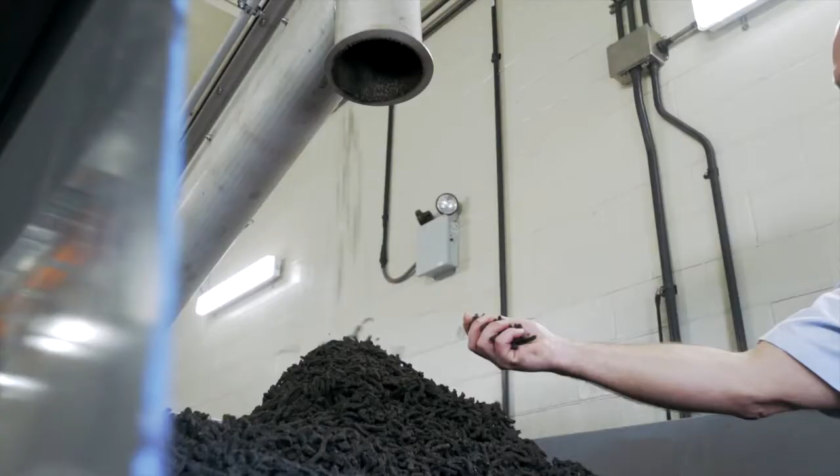As many of you may know, RMI has been a leader in residuals recycling for the past 25 years. We help municipal and industrial wastewater treatment plants recycle residuals such as short paper fiber, hydrosolids, and biosolids. RMI has handled dried Class A in the past and has become very familiar with the benefits of having a dried product. So RMI had a few strategic partnerships in mind.

We partnered with Brattleboro, Vermont, who was our first pilot installation, and our next was Hooksett, New Hampshire, both of which were very successful. Brattleboro has since wrapped up their pilot study, and Hooksett is about 6 months in. We will talk a little bit about both installations and what we're doing now, our next steps, in this upcoming presentation. Joining me will be Charlie Hansen, our senior project manager, and Steve Nurmi, our sales manager. We'll kick the presentation off with a little video about our Hooksett installation.

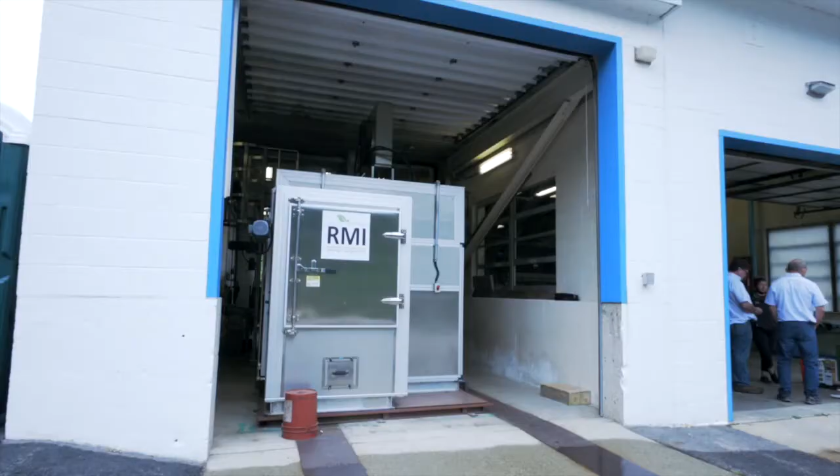The top 3 reasons somebody should go with the Shincci technology: one would be cost savings, the footprint is the smallest on the market, and the third being, it's simple. It produces an on-site Class A product that's ready to ship directly to farm. Competitive products are hundreds of RPMs, hundreds of degrees. We're 5 RPMs and 170 degrees, much more of a dehumidification than a drying.

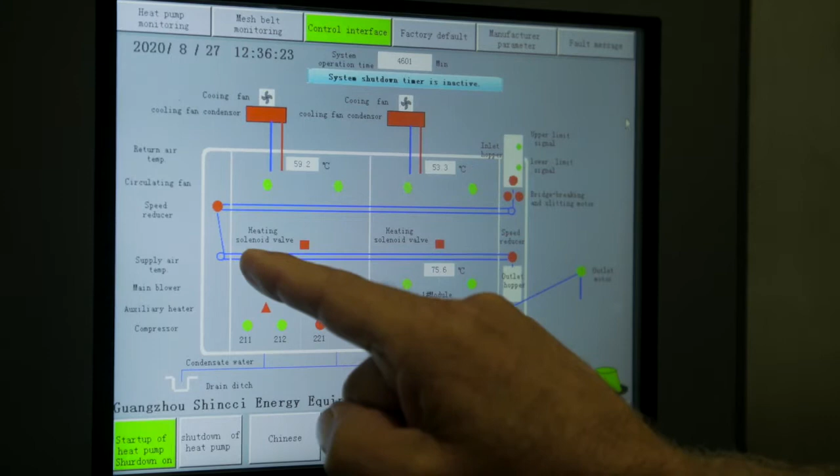The Shincci 4800 evaporates 4,800 kilograms of water in a 24-hour period. This facility is taking in 16.5% solids and discharging 93% solids.

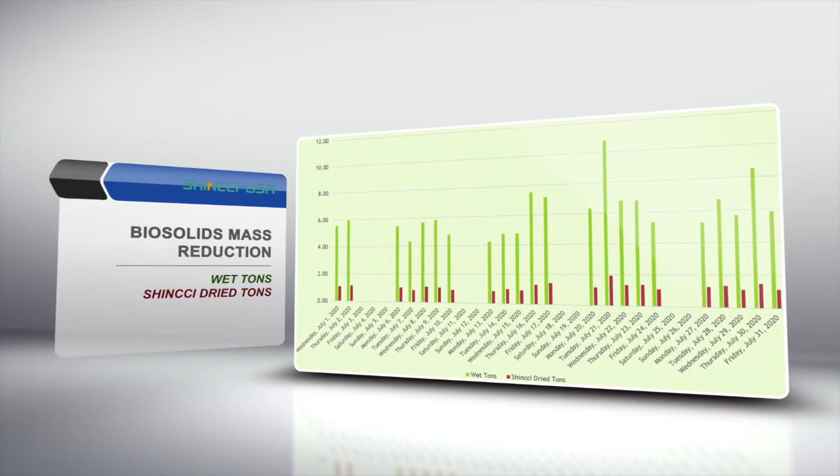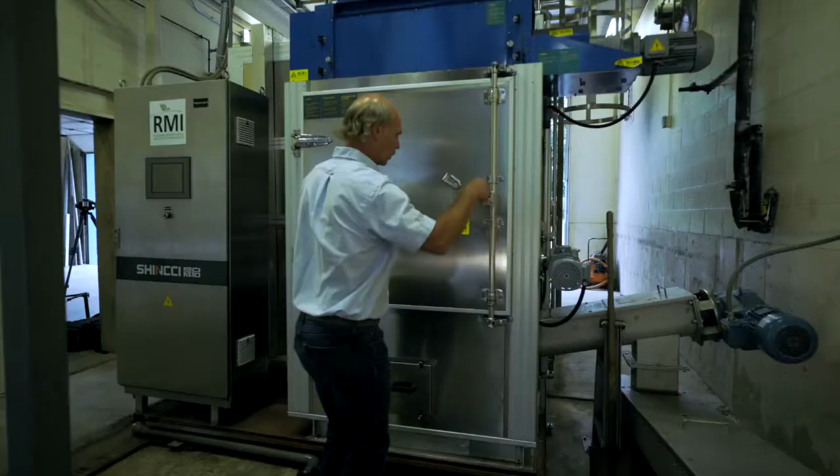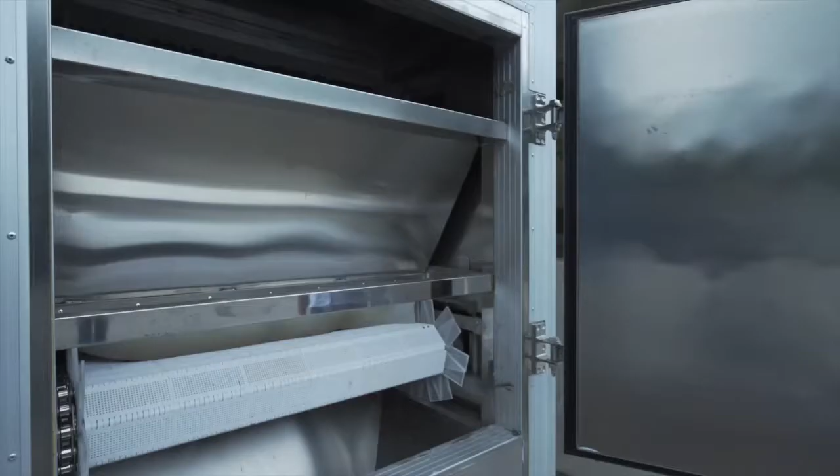Two proprietary things with Shincci are the slitter and the heat pumps. The heat pump is extremely efficient. The slitter is rollers, kind of like a pasta machine, versus an extrusion, which can clog up with the fiber. So we're going to take you right through the slitter, where we increase the surface area by making noodles. Those noodles will be laid down on a belt. It's a perforated belt that allows dry, hot air to come up through the bottom, as well as convection on the top. It travels down a top belt, turns once, comes back on the bottom belt, and is discharged at 90% solids.

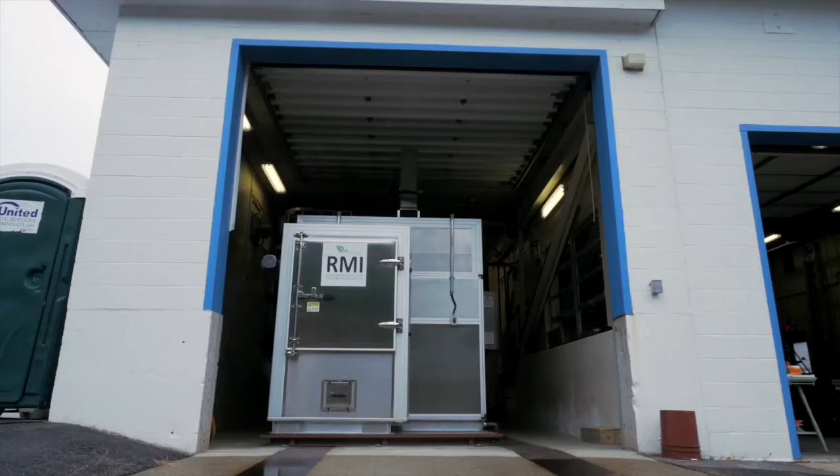The footprint is the smallest on the market. There are really only 2 sizes - you've got a small unit and a large unit. So it's not like we have models for all these applications, it's modular. One is 7.5 feet wide, the smaller unit, and 10 feet 2 inches is the larger unit.

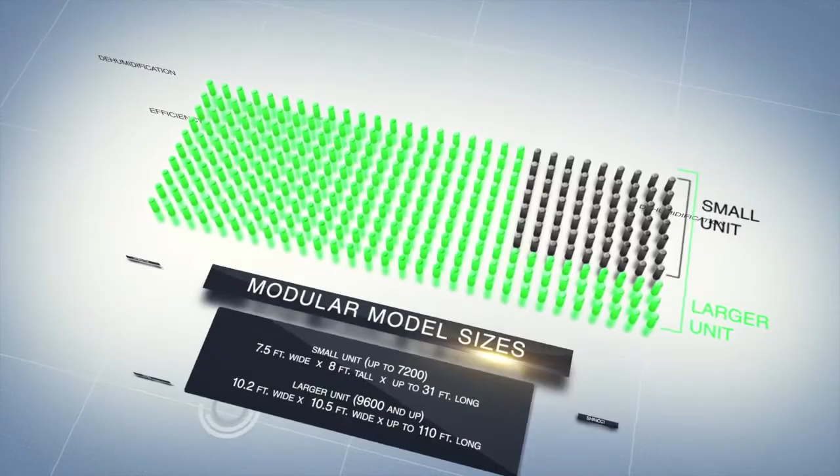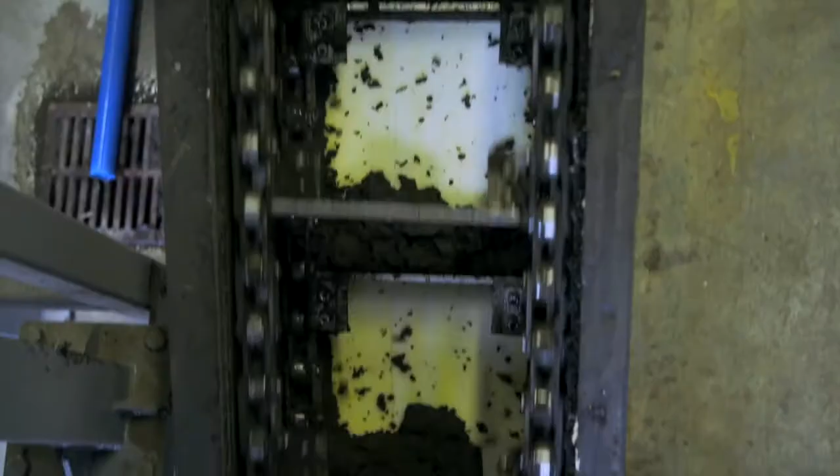Here at Hooksett, it's a very challenging type of wastewater solids to get the water out of. This is just what they call a secondary plant - there's no primary sludge being wasted off the process. After some initial challenges here, we're consistently getting about 17%, and the dryer is handling it great. We're easily able to keep up with the solids production coming off the process. So in this case, at this Hooksett installation, it takes about a little over 3 hours to get all the way through those belts, and at the end you get out a 90+% dried product.

We got into this because we were interested in making a great dried product and reducing the impact from having to transport all this material. When something's wet, you might have 5 loads of it, but when you dry it, you have 1, and that works out great.

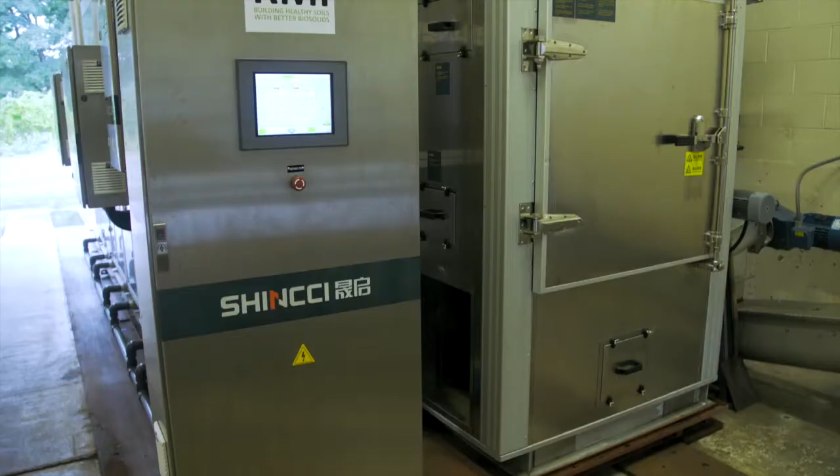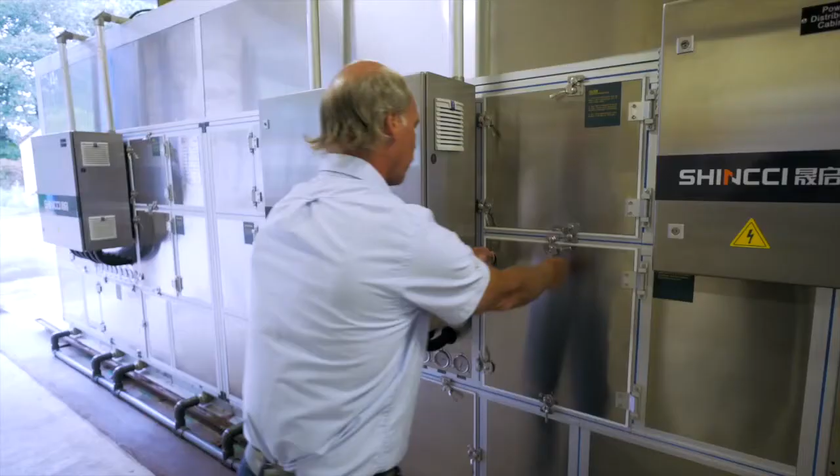We found operation costs and maintenance costs to be very low. It's about once a week maintenance, takes 1 to 2 guys about half an hour to 45 minutes. The monthly maintenance takes about 4 guys, 30 to 45 minutes. As far as addressing the costs, the superintendent here installed a meter just on the room itself, which encompasses the dryer and all the conveyance, so we can get real-time operating costs. To run the dryer 24 hours a day costs about $5.85 an hour. That also translates to about 180 kilowatt hours to dry 1 wet ton of product, which is even better than we could have expected.

RMI is committed to compliance, and our commitment to compliance ensures that the permitting process, not only for the installation itself, but for wherever you choose the end product to go - and we really hope that that's land application - is a smooth, easy transition. Most importantly, RMI is providing a solution to our municipal and industrial clients.

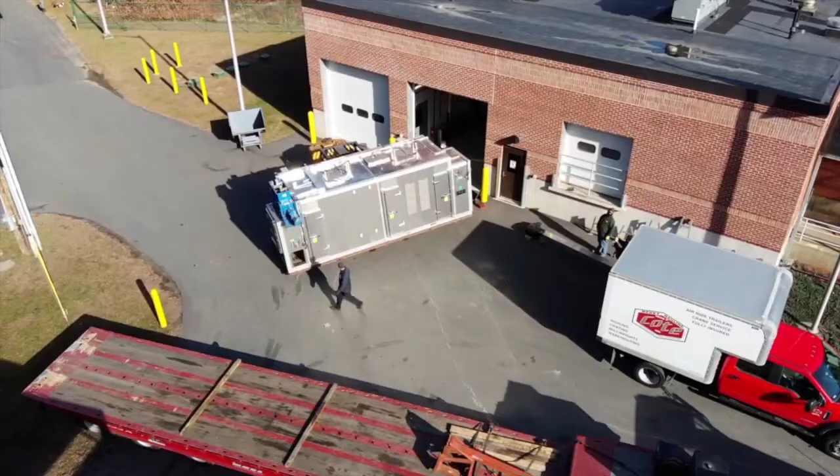Hi, I'm Charlie Hansen from Resource Management, and we were fortunate to partner with such a good treatment plant in Hooksett, New Hampshire. When we started pursuing the Shincci technology, the drying technology, they approached us about learning more about it. Fast forward, we got the dryer installed and up and running last May, the end of last May. Recently I had a chance to sit down virtually with Ken Canati, the superintendent at the Hooksett Wastewater Treatment Plant.

So Ken, maybe you could start off by telling us a little bit about the Hooksett Wastewater Treatment Facility. We do about 700,000 gallons a day, small plant. We do not have primaries here, we're a completely secondary plant. We've also added a solar component recently, it's going to lower our electric bills by 80%, is what they're telling us right now.

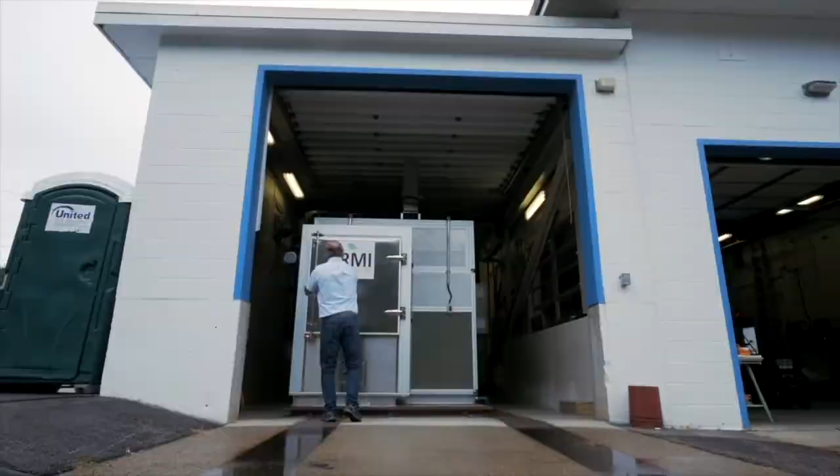Ken, maybe you could tell us a little bit about what your thoughts were when you first got thrown into, wow, there's a big box in my truck loading bay. I asked lots of questions of Charlie and Akram and the entire team. And we were running 3 truckloads a week to Merrimack.

Now we fill 1 container for RMI, and it takes us 2 to 2.5 weeks to fill the container. So we've eliminated 7 runs with a truck to 1. That's a lot of water we're not hauling anymore.

And what do you think is the most important thing from a sludge management perspective? It's a dry product now, it's an odorless product now when we leave out of here. Once it gets to 85%, there's no odor to this material at all. So we get to that 90%, now it's a Class A. We can farm apply it anywhere we need to. So it makes lots of options for us to go with instead of just hauling to a landfill.

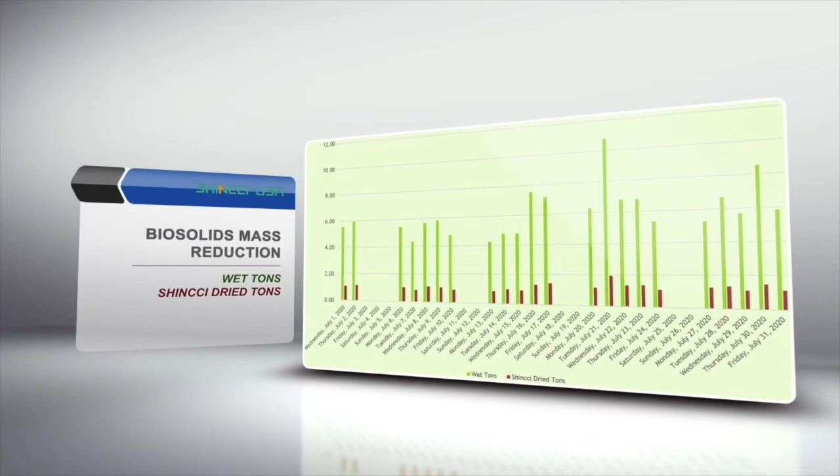Are you going to consider this technology as part of the permanent solution? Yes, we're definitely looking at this as the solution for what we need right now. The machine works, it's going to work into the future, and it's going to save dollars into the future. And I think all of us need to look at what the hauling costs are now and how much more it's going to cost us, especially with PFAS involved in this as well.

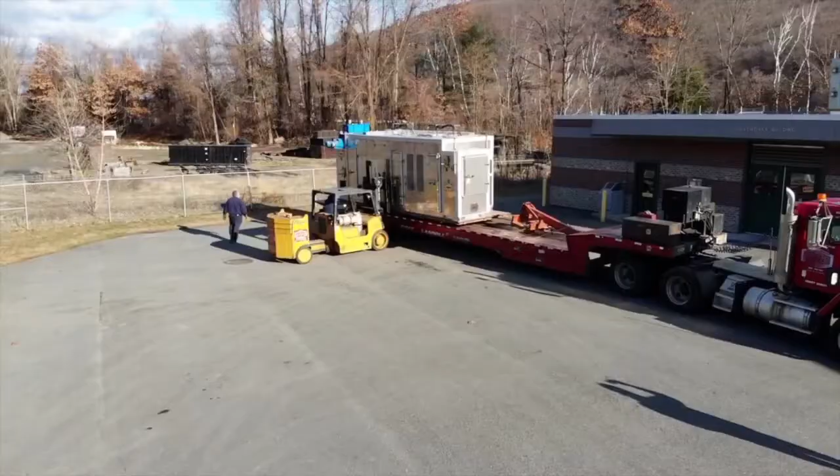So once we concluded that, we were approached by a town just north of Brattleboro, the town of Rockingham. The main municipal part is called the village of Bellows Falls. And Bellows Falls has a nice little plant, an RBC plant with anaerobic digestion. They've gone through a number of upgrades over the last 10 years. Chief operator there, Rob Wheeler, was very excited to add drying to a recently upgraded dewatering unit.

So recently I had the good fortune of being in person down at Bellows Falls, where we got to catch up with Josh, the lab manager there, to talk a little bit about what the drying unit installed at Bellows Falls has meant for them.

We successfully completed a pilot program with our longtime partner, Brattleboro, Vermont, at the end of last year. We also had friends up here in Bellows Falls who had been following and seen the dryer operating in Brattleboro, and were very interested to see if we could bring that unit up here.

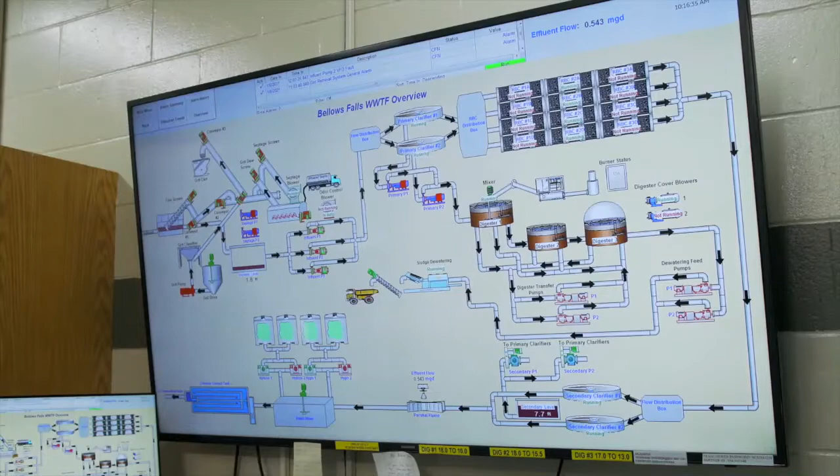So what we did is we put together a package, did the evaluation of the flow and the type of products they were making here, and put it all together. And within about 6 weeks, we actually had the dryer physically on site and installed and ready to go. And we've been making dried biosolids here for approximately 4.5 weeks.

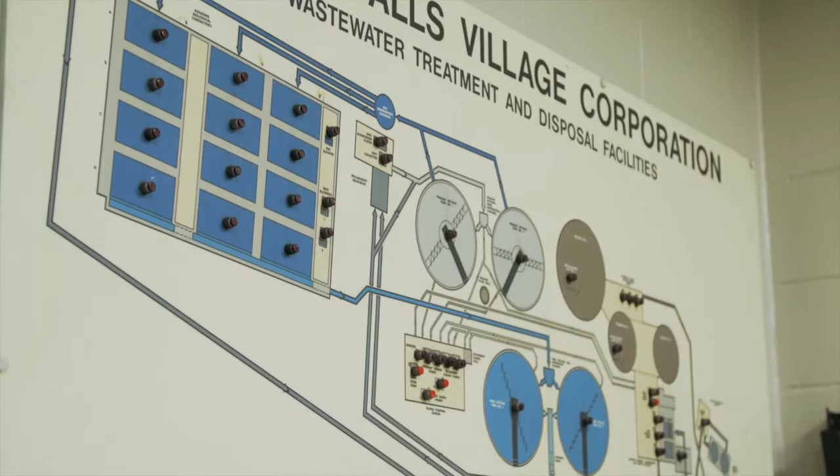My name is Josh Kemp. I've been here for 13 years. I have a grade 1 license and a grade 1 in laboratory. From beginning to start, we have an RBC facility. We produce around 350 wet tons a year, anaerobically digested. And the service area we provide is the town of Rockingham, Walpole, and North Walpole.

Historically, we were going to Claremont, New Hampshire, disposing of our sludge, and it was getting composted and reused. 2 years ago, they had a process stop in New Hampshire, and it caused us to go to Coventry, Vermont. And now our cost of sludge disposal has tripled. With the Shincci dryer that we are now using, this will cut our costs quite a bit.

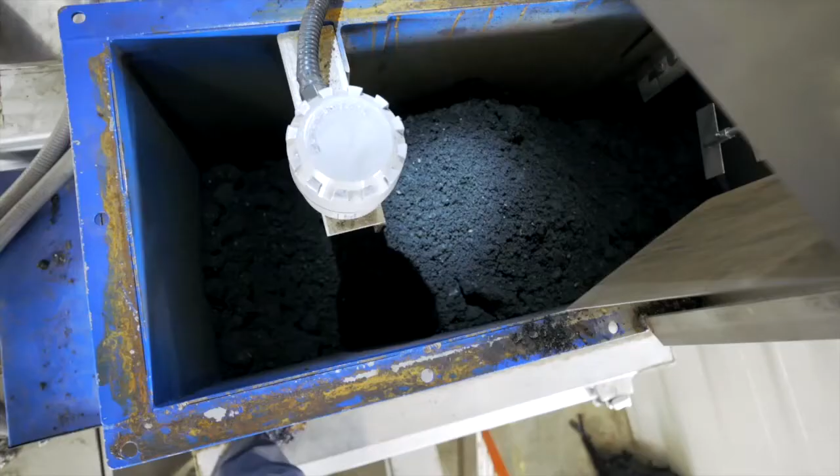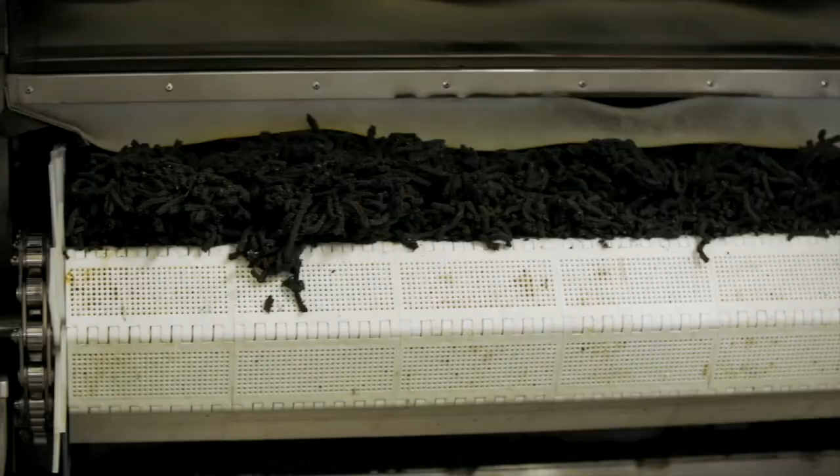I feel that the cost of bringing the sludge to landfills is going to be not only uncost effective, it's going to be odorous, and there's going to be other issues that are going to cause places to close down fast. The Shincci technology was pretty much a no-brainer, but the cost effectiveness of drying it, we're now filling one dumpster compared to 4 dumpsters in a week.

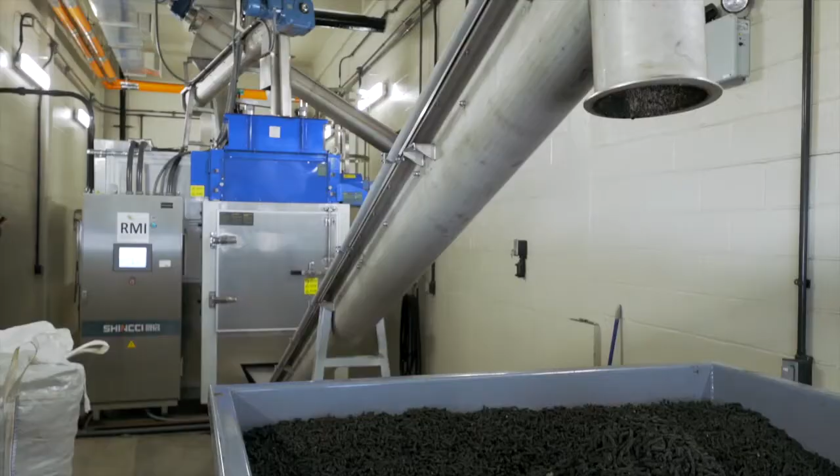The beneficial reuse of being able to use this drying product on farms is going to be 100% better than putting it in a landfill and wasting the opportunity to use the nitrogen. I think that the Shincci dryer is the way to go, and a lot of plants need to really consider having that process put in and have it looked at.

Hi, I'm Steve Nurmi, sales manager with Resource Management. I've been working on the Shincci technology for a little over 2 years now. I'd like to take you through an overview of the dehumidification process.

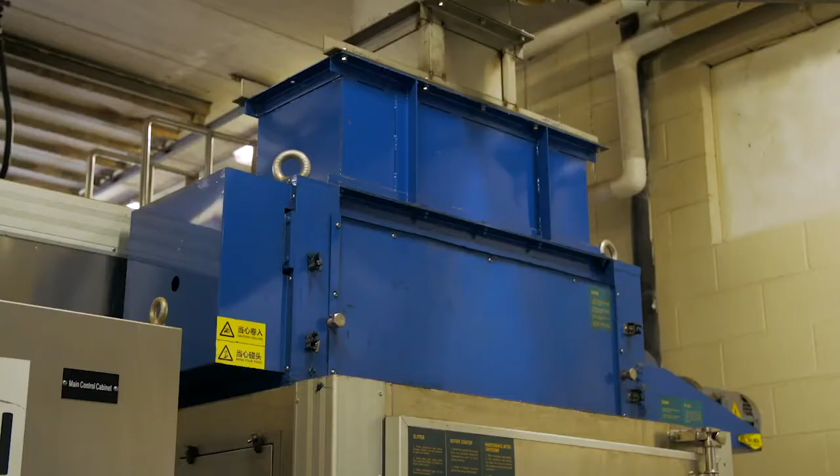That process starts with what we call the slitter box, where we receive the cake that's coming in. We take that cake, 18 to 25% solids, and put it into a noodle form, almost like an industrial pasta machine. By creating these noodles, we're increasing the surface area, and we lay that down on the upper belt. There are 2 belts, an upper belt and a lower belt.

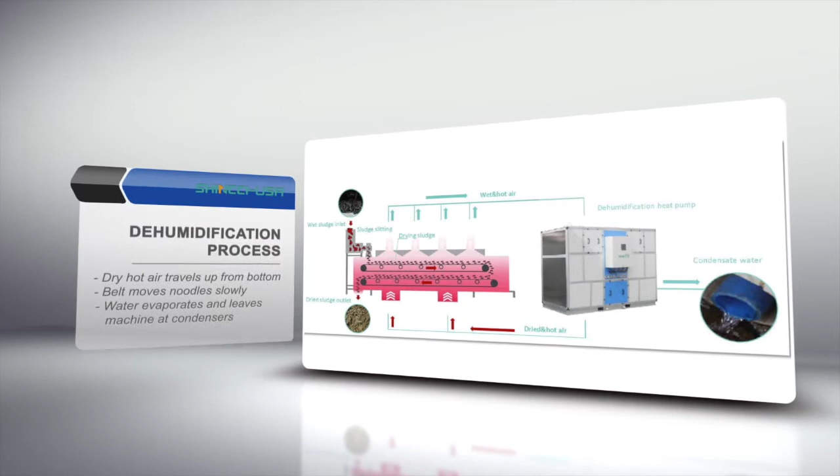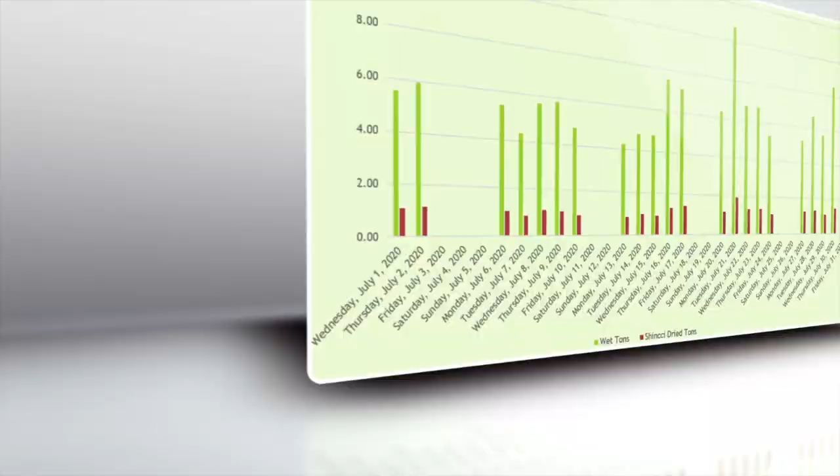The air is traveling through the belt and the product, while it's also a convection process. As it turns from the top belt to the bottom, that product's just flipping once, minimal movement, very stable product. In that process, the moist air is evaporated by a set of condensers and discharged through a condensate pipe back to the headworks. That hot moist air goes to proprietary heat pumps, which are extremely efficient. They're drying that hot air, bringing it back up to temperature, and recycling it right through that process with the belt. It's 5 RPMs, 170 degrees, very different than the other technologies out there.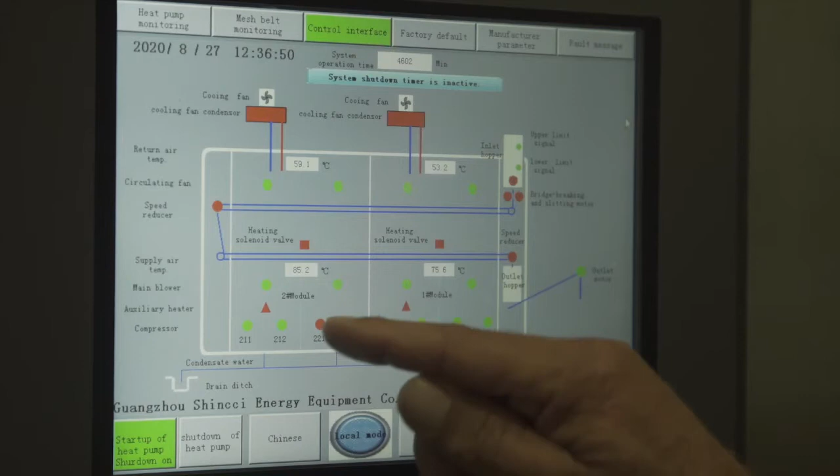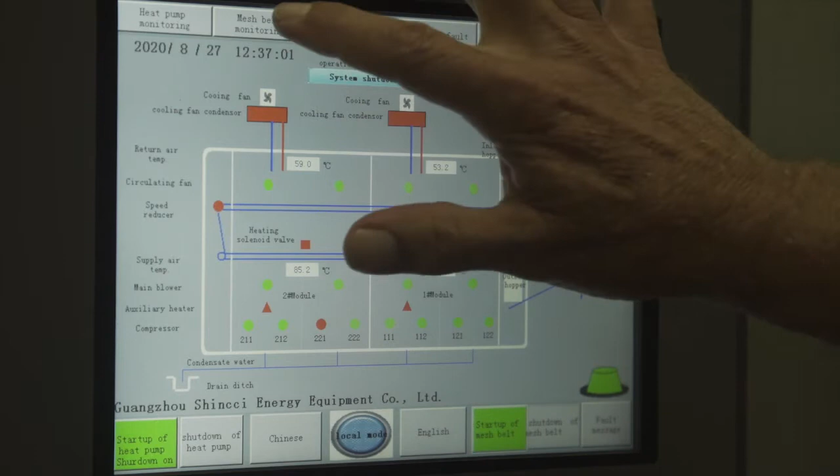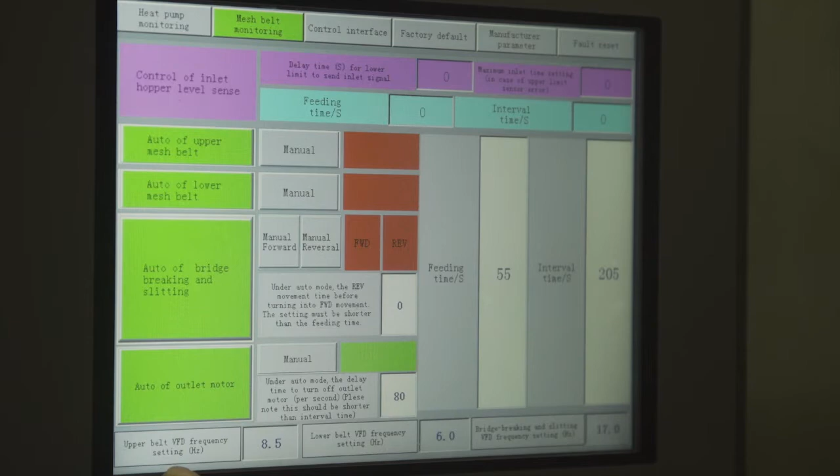The entire process is controlled by one touchpad, a touch screen that is on the dryer. That touch screen on the main page shows you everything that's happening from the slitter through the belts, your temperatures, the compressors that are on and off. They'll shut off for efficiencies when you reach temperatures, and they're not running all the time, and all that is visible on one page. On another tab, it gives you all the parameters to really dial in to the specific characteristics of your sludge.

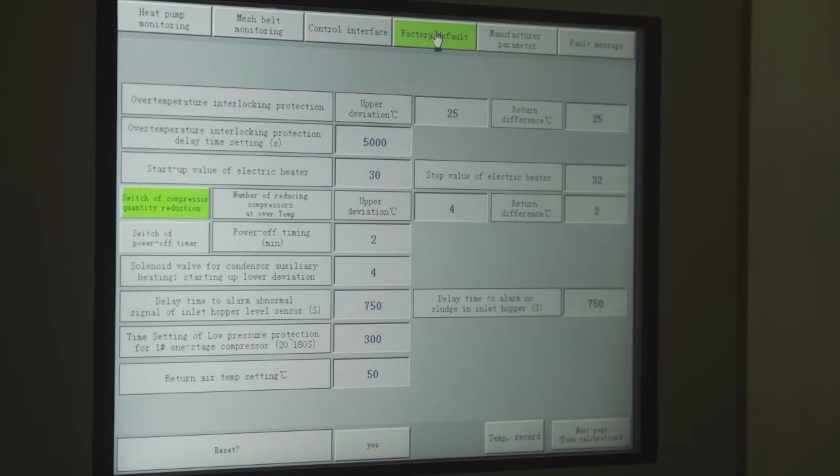You control the upper belt speed, the lower belt speed, the amount of product that's being applied to the belt through the slitter, all on one screen that's there.

This process does provide an on-site Class A, but to be Class A, you need to achieve vector attraction reduction and pasteurization. Pasteurization is achieved by spending over 30 minutes on that lower belt. Vector attraction reduction is achieved with the 90% solids being discharged on the other end.

If the facility is anaerobically digested and does meet the 38% reduction, it's only required to be 75% solids on the other end, but we almost always shoot for that 90%. It just makes a more manageable product and a better fertilizer.

But in the event it does go towards landfill or other applications required by regulation, this is still a great means to manage the product. It's taking the water out, reducing the weight that's being hauled, reducing tipping fees that are being paid on a weight basis. Whichever direction the market goes, it's just producing a better product.

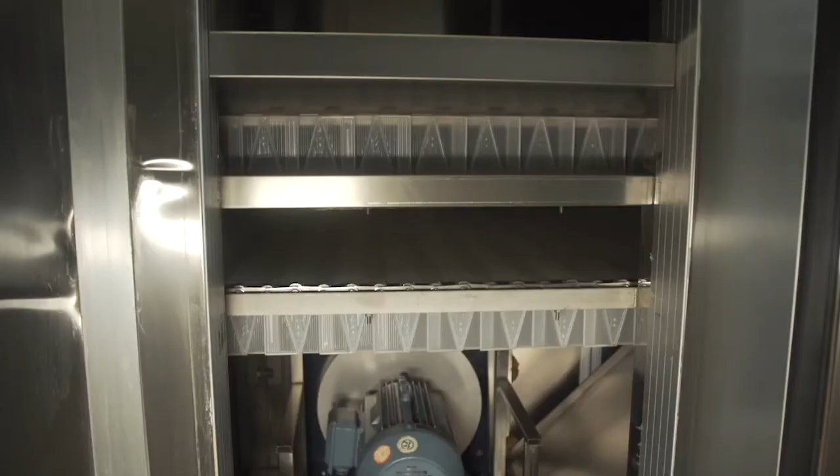As far as maintenance, maintenance is pretty minimal on this. It takes 2 people about a half an hour once a week to clean the filters. There's a set of combs under the rollers in the slitter box that accumulate fiber, which could be every 2 to 4 weeks. Typically, we'll take those out, clean them, put those back in, and grease the bearings and fittings on a monthly basis. But you're talking a couple people, 30 to 45 minutes once a week to maintain the dryer.

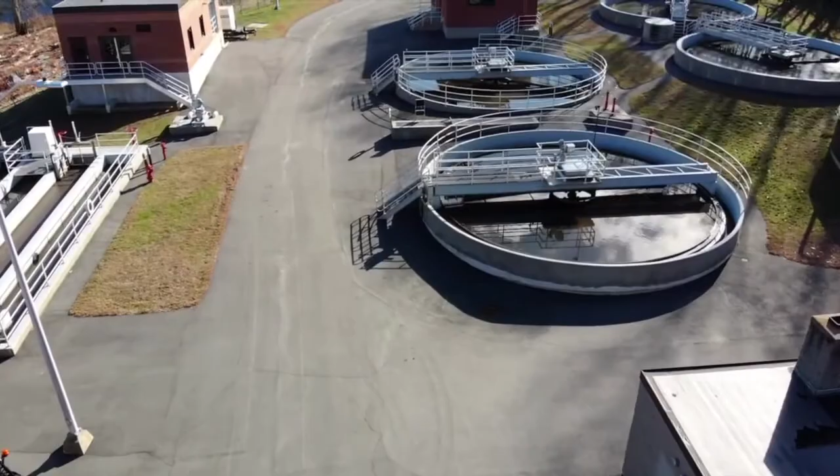Differences in the 2 facilities we're working with right now: We've got Hooksett, which is feeding a hopper with 18% cake, dewatering during manned hours, and feeding the dryer throughout the night. Bellows Falls is directly feeding the slitter out of a PW Tech screw press and only working during manned hours, going in at roughly 26%. Same machine, slightly different applications, delivering the same 90% total solids on the end.

Top 3 reasons to choose this Shincci technology. First off would be cost savings. It's competitively priced in the marketplace, and it's extremely efficient to operate.

Secondly would be the footprint. It's the smallest footprint on the market, the 4800s we're talking about here today, and they're 7 feet 2 inches wide, 8 feet high, and 21 feet long. So a very small footprint.

And then lastly, they're simple to operate. They're really a neat technology that is dehumidifying more than drying, and there is minimal operator involvement during the day. I appreciate your time, and I'll turn it back over to Charlie.